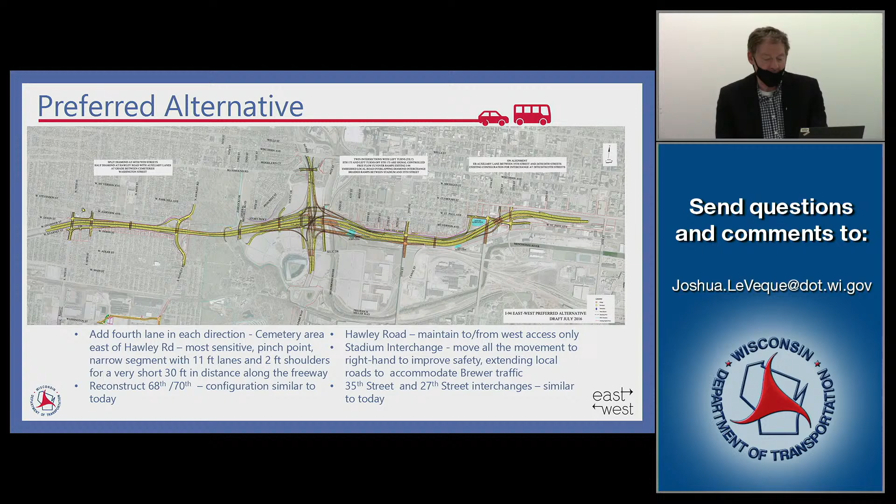So now a little bit more detail about the preferred alternative. Again, the cemetery area east of Hawley Road is our most sensitive. In green on this graphic is the new proposed lanes with the full 12-foot wide shoulder, 12-foot wide lanes, and nominal shoulders. In yellow is the area where we're transitioning down to the 11-foot lanes. And in the orange color is the 30-foot distance where we actually have the 11-foot lanes. Again, those orange areas, both eastbound and westbound, are about 30 foot in distance.

So now the stadium interchange, we're going to walk through some of the most important movements. Again, yellow is the new pavement, orange is the new bridges. In dark blue, we're showing the movements for eastbound traffic to get to 175. They're on the rightmost side of the lane configuration.

To go north, you're at the top level and you're taking a ramp over most of the other work to get north. To travel south, you're in a very similar configuration to today, taking a ramp to head south down 175.

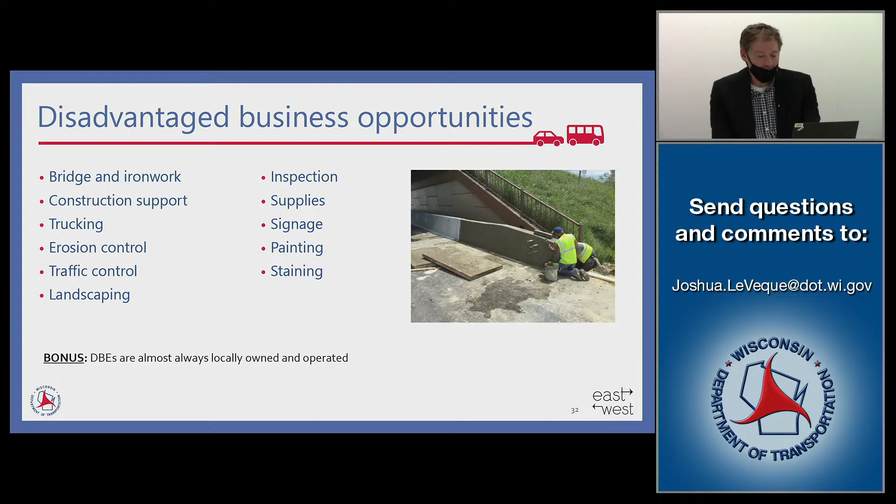We've gotten a lot of feedback about understanding the effect on property values that the project may bring to people who live near the freeway. What I want to do is read to you what is in our current EIS. Under the preferred alternative, the location of I-94 would be similar to where it is today, but to determine the net change to property values due to the wider right-of-way would be difficult because the project includes noise walls and changes in access that may also contribute to both increases or decreases in property values.

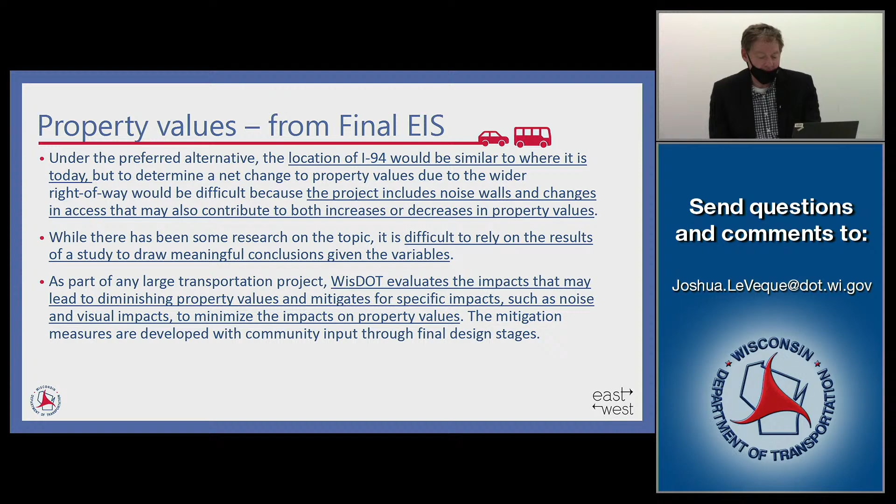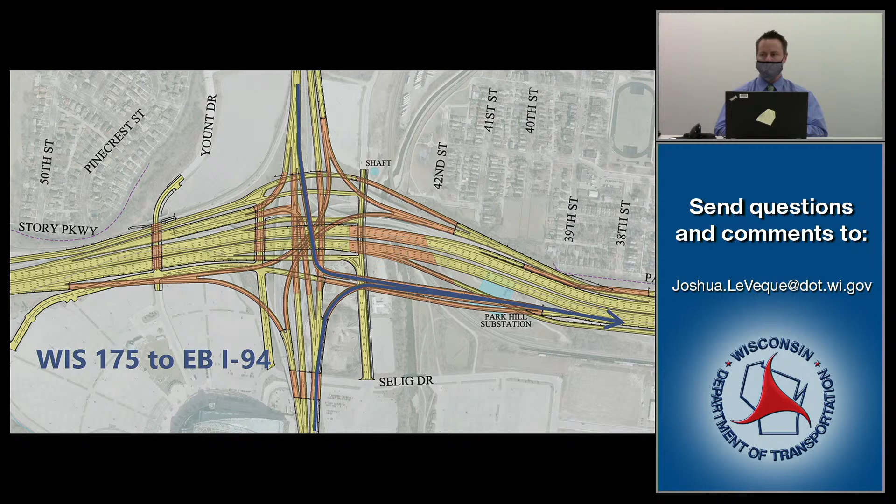Okay, thank you. We have a question here about the height of the stadium interchange. How high is the highest point of the interchange, and how does it compare to the bluff along Story Hill?

Sure, I'll take that one. Due to moving the exit ramps to the right-hand side, we're adding a level to the interchange and embedding the local street beneath it. So it's going from what we'd call a 3-level interchange today to 4 levels, and by that change, the height of the interchange is increasing by approximately 25 feet.

I did a quick check as I saw that question come in. Compared to Story Hill, from what I can see on some plans, that's about an elevation of 665 to 670, and the top of the new interchange will be about 685. So it will be slightly higher than at least the southern edge of Story Hill, but I can't see farther than that. So again, a 25-foot increase from today's highest ramp to the highest ramp in the future, which would be at 685, compared to Story Hill at about 665 to 670 today.

Thank you. We've had a number of questions and comments too about public meetings, and whether or not we're going to have any additional public meetings after this point.

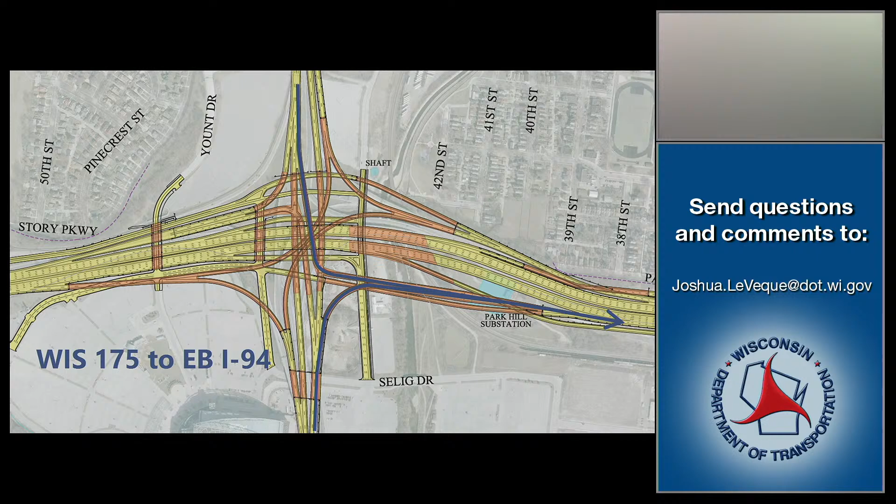And just to add to Jeff's answer, I want to emphasize that induced demand is different from pulling traffic off the local system, which we consider a good thing. If traffic can use the freeway rather than a local street, and it's the appropriate use of our facilities, that's not a bad thing.

We did get a question about how someone can submit additional comments. In addition to monitoring the chat, there is an online form on the Wisconsin DOT East-West Corridor website. If you go to Wisconsin DOT and type in I-94 East-West, you'll get to the project website pretty easily. We've also got Josh LeVeque's email on the screen here. Josh is the project manager and he's getting emails throughout this as well. We'll try to answer as many questions as we can tonight, though we won't necessarily get to everything coming in through these different mediums, but that's how people can submit other questions.

We have a design question about the traffic at the pinch point just east of Hawley Road. He wondered if we had looked at the old rail and We Energies easement just north of I-94, which I think is the section along the cemeteries there.

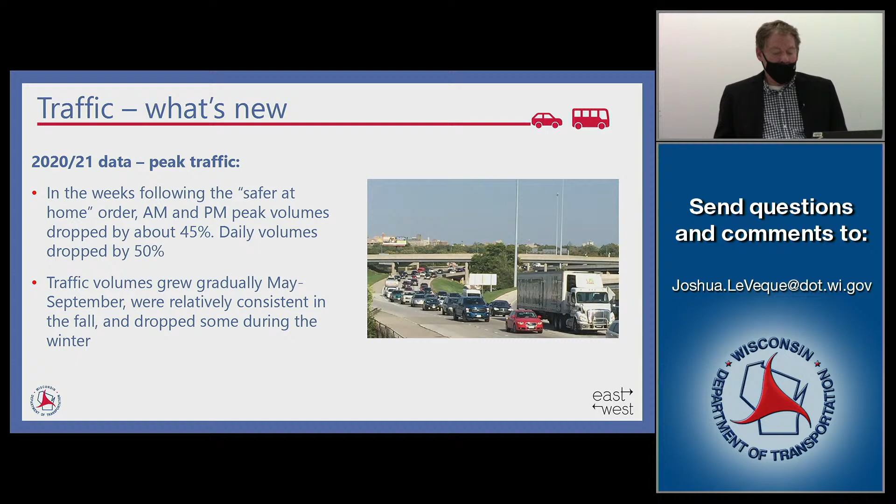Right, so we obviously have been paying attention very closely to the effects of COVID. Almost exactly a year ago today, when the Safer at Home order hit, we saw AM and PM peak hour volumes drop by 45%. The overall total volume in March of last year dropped by 50%. Then, a little later, about May through September, there was a consistent return of traffic, pretty consistent growth back toward pre-pandemic levels—never quite got there, although in the afternoon peak hours we were very, very close.

And since this winter, we've seen a bit of a drop. So I think it's fair to say there's been lots of fluctuation over the last 12 months. We're continuing to study that. Exactly what this means for trends is really the big important question, and we haven't reached any conclusion yet on exactly how the pandemic is going to permanently affect traffic volumes.

To go over it again, what we've done so far is a sensitivity analysis on how much reduction we would need for the project to change from an 8-lane proposal to a 6-lane proposal. Basically, it's a sensitivity analysis looking at pre-pandemic levels, going down in 5% increments from 0 to 5 to 10, and we got to 25% before we reached an acceptable level of service. So our conclusion is that we would need a 25% reduction in 2019 traffic to no longer justify the 8-lane, and right now we're not at that level of reduction.

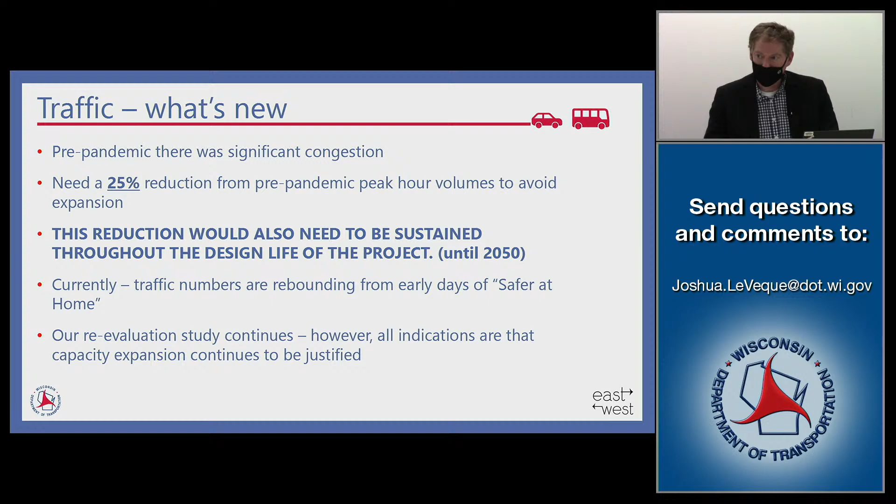There's a number of questions and concerns about safety in the stretch where there are narrow lanes and only 2-foot shoulders — about safety driving through the narrow lanes, and whether someone can pull over safely where we have 2-foot shoulders. So if you could talk about the safety concerns in that area.

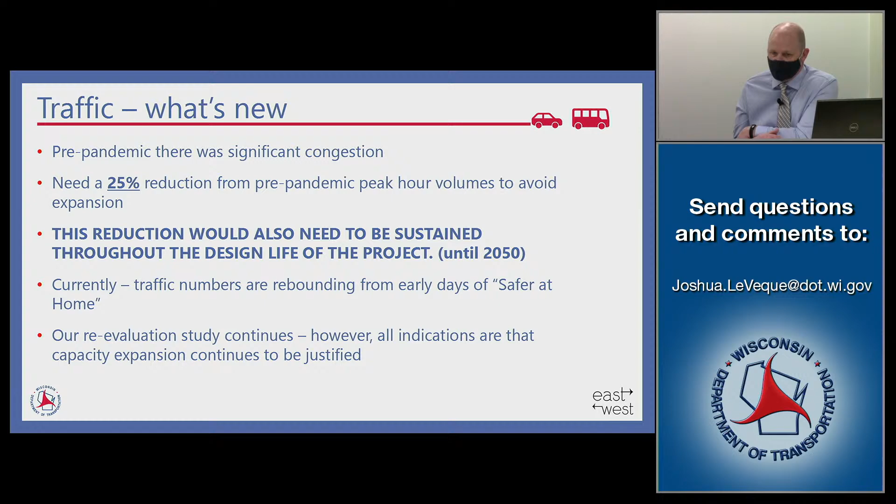Sure, the key points to hit on that: the length of this narrow section, where we're actually at 11-foot lanes and a 2-foot shoulder, is only 30 feet. The distance from the start to stop of the tapering is about 1,600 feet. If you drive this section of freeway, you know that on I-94 westbound approaching 25th Street, there are solid white lines for a significant stretch. That entire section currently is 11-foot lanes and narrow shoulders, through a curved section, so this will be much reduced from that condition.

Yes, we fully realize the short distance of narrow lanes is not desirable, but it's needed to honor our commitment not to impact the cemeteries. In addition, the removal of the eastbound entrance and exit ramps from Hawley in that area will reduce another conflict point, so we have a tangent, straight section through there with this 11-foot lane, and again for a very short distance. So all those factors, we feel the safety impact is minimized.

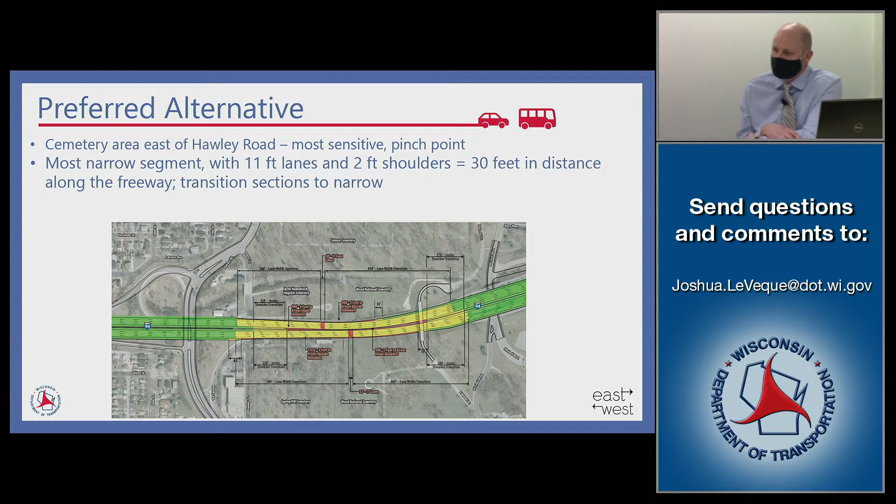Okay, thank you. There's a question about Washington Street and how it may impact the busyness of the intersection for people trying to get in and out off of 70th Street. Can you talk about any coordination we've done with the city of West Allis on Washington Street?

How that will all be planned — well, maybe a little more detail in general about Washington Street. It goes from Hawley to 70th Street. There's an existing section of Washington Street that pre-exists, and the new connection the project is proposing to construct will facilitate it. The whole goal is to have a clear, easy route for many of the businesses near Hawley that want to go east to get over to 70th so they can connect to the freeway.

It is a very congested area, a challenging and very tight area right now. I know that the work on 70th Street itself, some of the widening proposed as part of this to facilitate that busier intersection, is in a very limited area where we can do that work. So we acknowledge it's a busy area. We think the improvements are supported and coordinated. We're coordinating very closely with West Allis and supported by West Allis. We think it'll help partially mitigate the changes we're making up at the interchange.

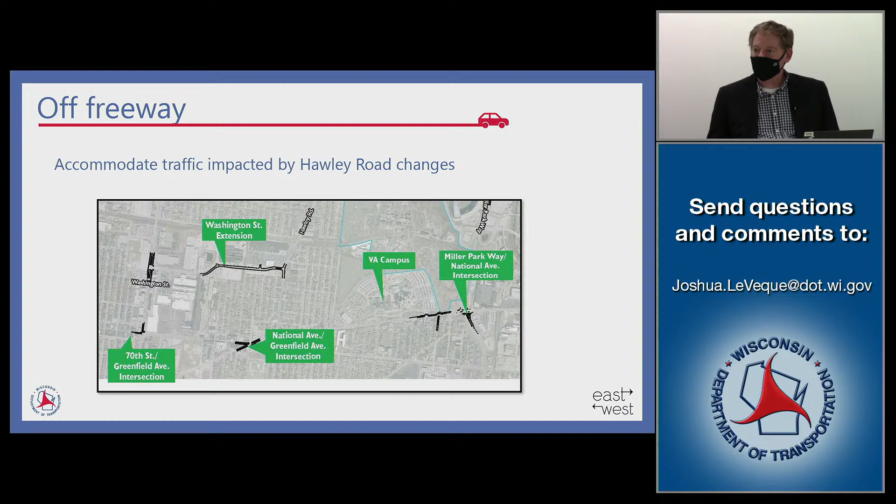Based on some of the comments we're getting from different sources, we've talked about how during rush hour, 76% of the traffic starts or ends within the corridor, and I think people are perhaps thinking that it all just travels within the corridor and not people coming to or from. So could you explain that concept a little better so people have a better understanding that it's actually people coming from another location, but maybe ending or starting there.

Sure, so this was a little bit older data from 2012, based on some origin-destination survey information. It assumes that if you're using the interchanges along within the project limits, say 27th, 35th, Hawley, 68th and 70th, you're accessing those from a fairly nearby distance, so it assumes those to be local trips. Those movements at those interchanges are considered local, therefore part of the 76%. The other end of the trip could be outside the corridor. The two examples we gave, UWM, is certainly well outside the corridor, but one end is at UWM, the other end of their trip is near the stadium, so they're using presumably the stadium interchange or Hawley to get to their end destination. I don't know, Beth, does that help explain it?

Maybe the other way to put it is that the 24%, the counter, is somebody who enters this corridor at 70th and travels all the way through, not exiting or entering on any of the other ramps or the 175 interchange. So again, three-quarters either enter 94 at one of our interchanges or exit, and one-quarter drives all the way through in the peak hour.

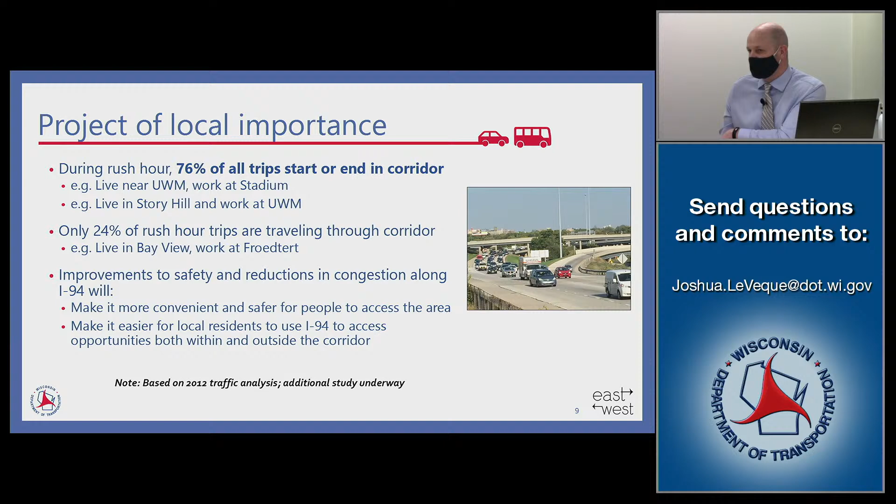Now, this is one question that I'm not sure people would have off the top of their heads, but I'm going to ask just in case. If not, we can always get back to the person.

There's a question about how we manage stormwater runoff, and do we know how much funding is spent on stormwater versus noise barriers? That's not a standard number, it's a project by project situation. That would be an answer we won't have until we're much further in the design process. There is a part of that process where people get to vote on that. So even though we understand pretty well the potential locations of noise walls, once we get further into our design, whether or not we build them is still up to the local people who get a chance to vote on them. So we'll know very late in the process how much the noise walls on this project cost, because we're not sure we're going to build them all.

There's questions here about bike and pedestrian connections, and whether any consideration has been given to improving the pedestrian and bike connections between the near west side neighborhoods and the valley, noting that I-94 is a huge barrier for making some of those connections.

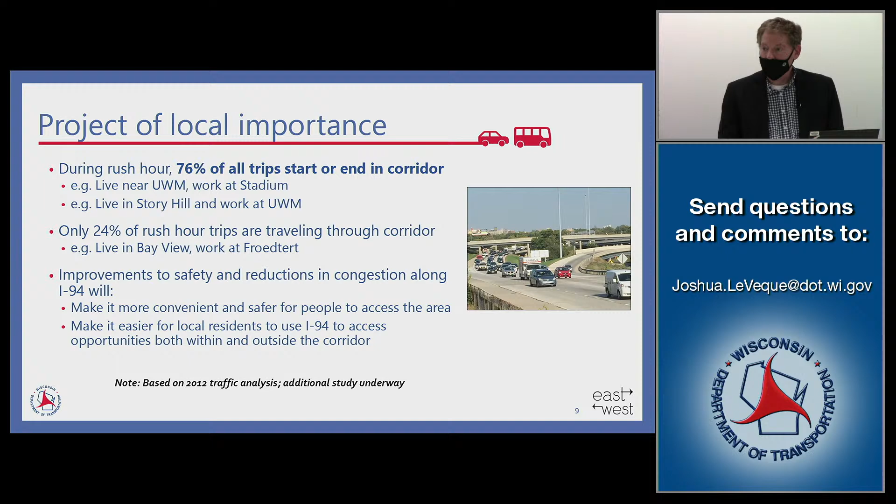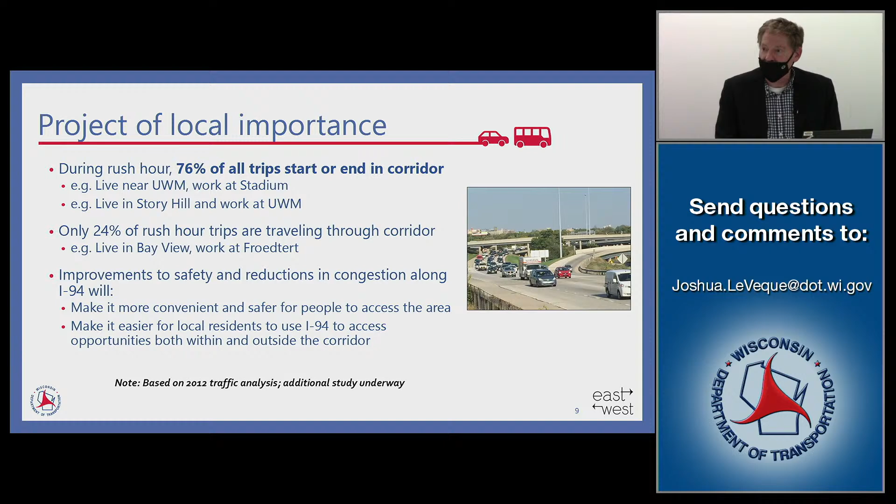There was a question about who does the reevaluation and how the process works - some people may have missed the early parts of the conversation. It's really the department. We hire consultants to help us with that process, but it's the department's project, our responsibility to document the impacts, write the EIS, get approval from federal highways, and it's our obligation to reevaluate that after a certain amount of time has passed. So the department's the lead on that.

Sorry, I'm trying to locate different questions here. Are we cutting into the bluff near Story Hill, and how much are we cutting into it?

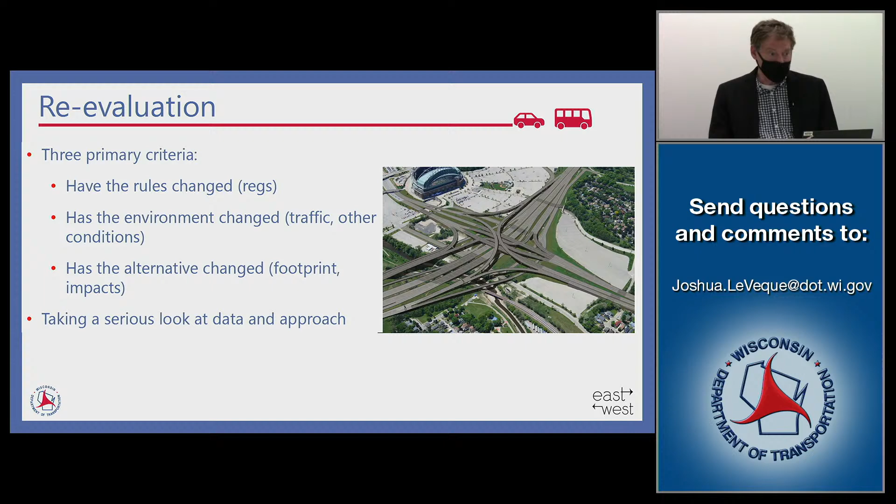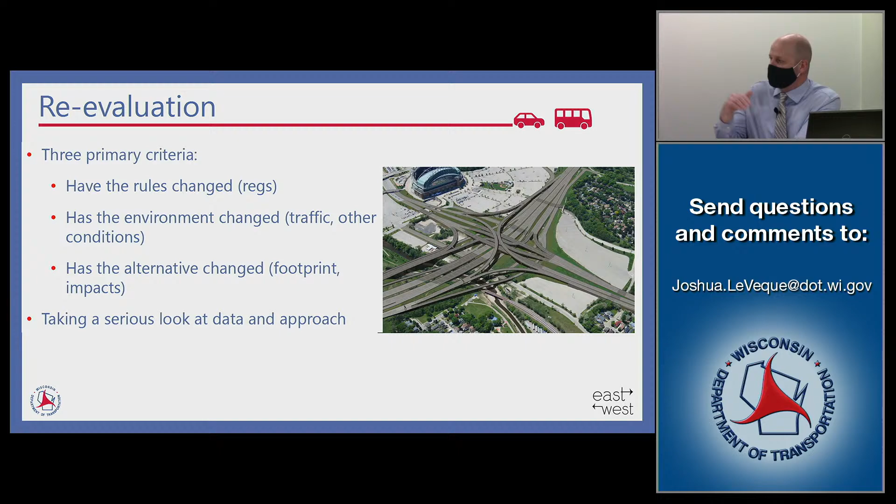Short answer is no. There's one part of the design not highlighted to this point - on the north side of the freeway as part of the current preferred alternative, the plan is to construct a new frontage road carrying local traffic from Mitchell Boulevard over to 46th and 44th. That frontage road is set to be no further north than the current north edge of the freeway and the Mitchell exit ramp. So our plan is not to cut into the hillside at all. All the widening, the extra ramp width and length for the new stadium interchange, is being pushed to the south.

There have been questions about why the savings on a project can't automatically be spent on transit and local roads. It's really because of who gets to set the priorities. It's at the legislature's discretion how much money gets put in the pots, and the transit pot is different from the highway pot and the local road pot. They set the priorities by setting those budget amounts. As the department, we can't take money the legislature said should go for highways and put it into transit. It's whose job is it to set priorities, and in this case it's the legislature's and the governor's job.

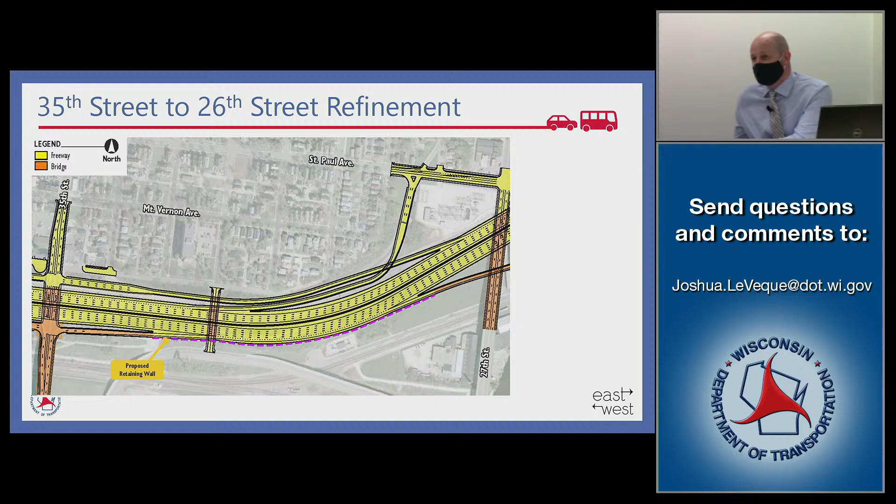There's a follow-up question about the bike-ped improvements: could those same improvements be made with a 6-lane modernization as well as an 8-lane alternative? Yeah, I would say yes. I don't think there's any limitations. I can't think of anything offhand. I would say in general, very likely yes.

Okay, there was a question regarding the design: will the freeway be raised 30 feet, or will there be a gradual increase? I'm sorry, I don't know where the 30 foot came from.

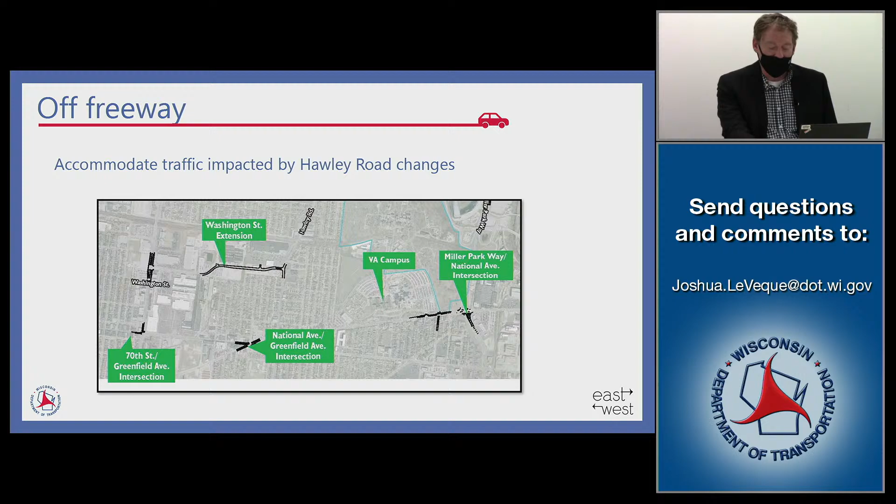We're sorry, talking about maybe the 25 feet in the stadium. In general, the elevation of the freeway is going to stay very close to where it is today. The one area where it does change is in the stadium, because we're going from a 3-level interchange to a 4-level interchange, and that increase will be very gradual. It'll mostly affect the ramps coming into the interchange, because the highest level ramps are what we call the flyover ramps.

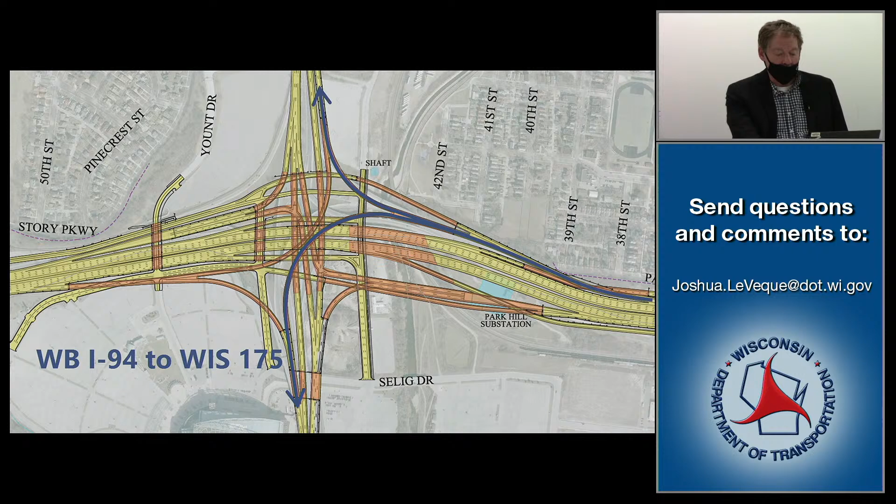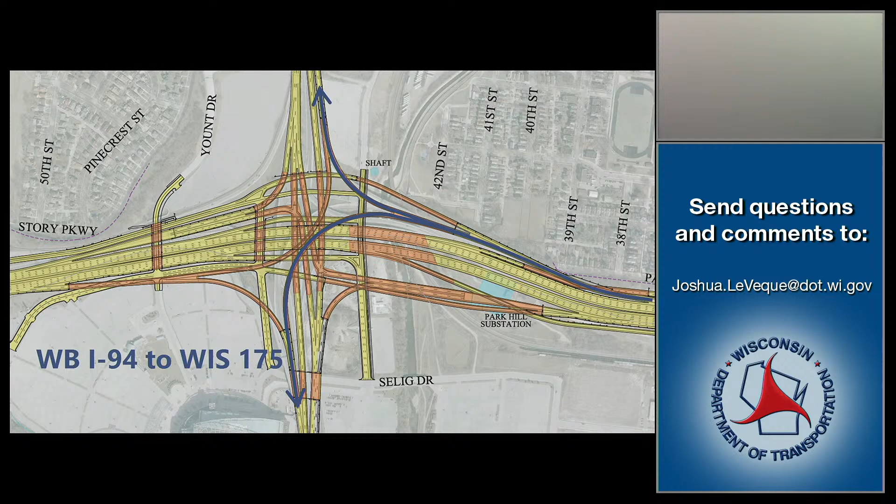Going from eastbound I-94 to northbound, and the complementary westbound to southbound move. Those are the highest ramps, and the slope on those ramps will be fairly modest and gradual. Everywhere else along the freeway is staying at a very similar elevation to today, and all the local streets that go over or under are in that same general configuration as they are today.

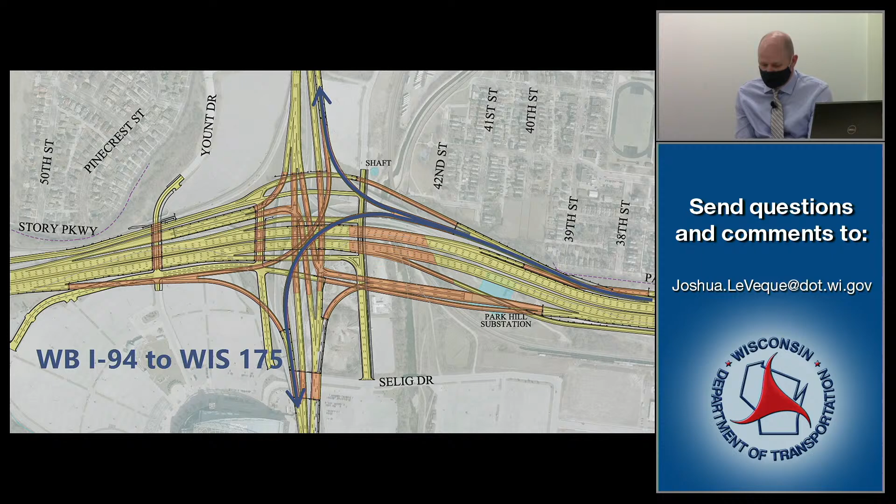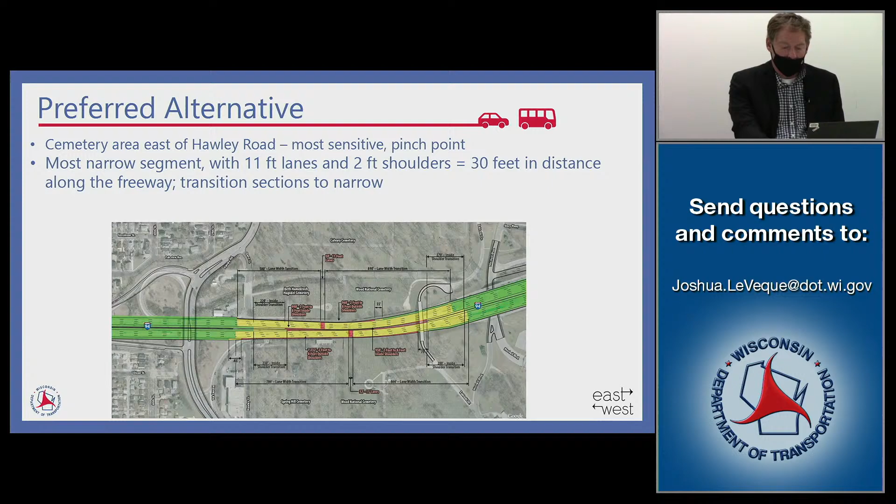We've had some repeats of earlier questions, including how highway expansion leads to revitalization in minority communities. I wonder if you could talk about some of the work we've been doing with Near West Side Partners and Menominee Valley, working to get economic revitalization in that 27th Street corridor and greater connectivity, since that may help address what's probably the most important part of the question: how we can help make that change on this project.

I think what we've heard from Menominee Valley Partners and Near West Side, two business organizations based in that area, intersecting here at 27th and St. Paul, is that they view the project as an opportunity to make the area more attractive, more connected, more integrated with the community, with less opportunity for panhandling and other criminal activity. We're hopeful to achieve some of those goals by working with them.

In more general terms, I think the fact that we've talked about DBE opportunities, and how lots of DBE businesses are locally based — for the zoo interchange, that was over $100 million of contracts that went to DBE firms — that's another way we very directly impact the minority community.

There's a question about traffic projections. We've come back to traffic a few times, but people are saying they believe traffic in the corridor has been flat for, some say 10 years, some say 20 years. I don't know if you want to address traffic in the corridor in general — there were certainly impacts during construction of the zoo interchange, many years of impacts, as well as the recession impacts around 2007-2009. Maybe you could address some of the other things that impact traffic.

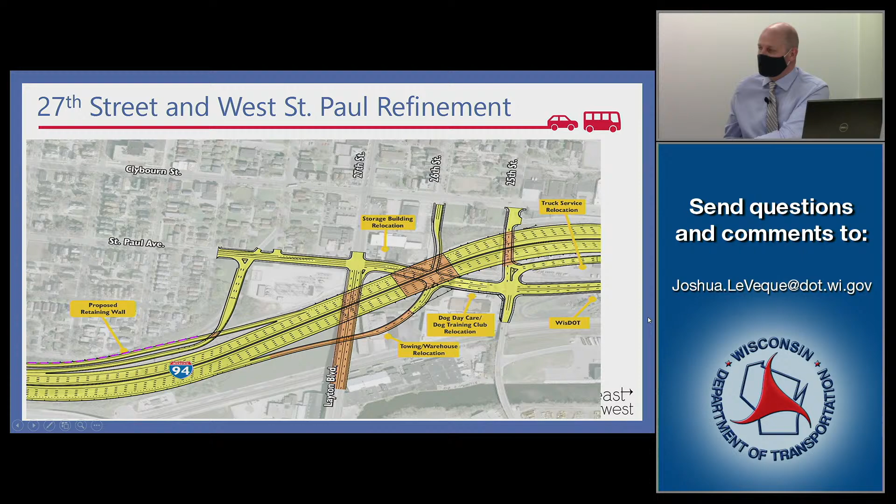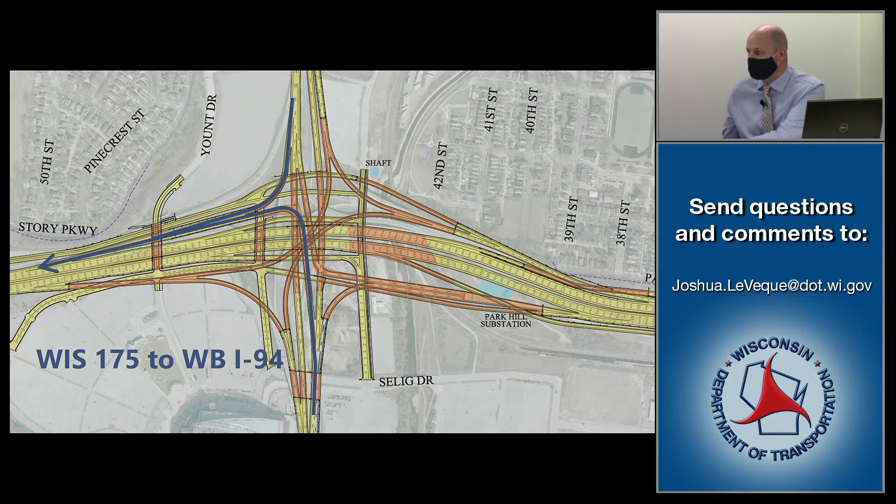I'll add that it is the department's plan to at least analyze stadium traffic discharging and how that overlaps with some of the PM peak periods, both coming in for evening and night games and discharging for afternoon games. So we'll be looking at that and working with the Brewers and the Stadium District on how we can most efficiently handle that traffic while maintaining, most importantly, the traffic on 94 east-west. Sometimes I call up the stadium interchange to show there's so many intersections and design details that can be looked at in terms of how it affects the offloading and loading of Miller Park, AmFam Field parking, and those are the types of things I think we're open to. But the amount of lanes on the freeway is probably something we're not able to accommodate.

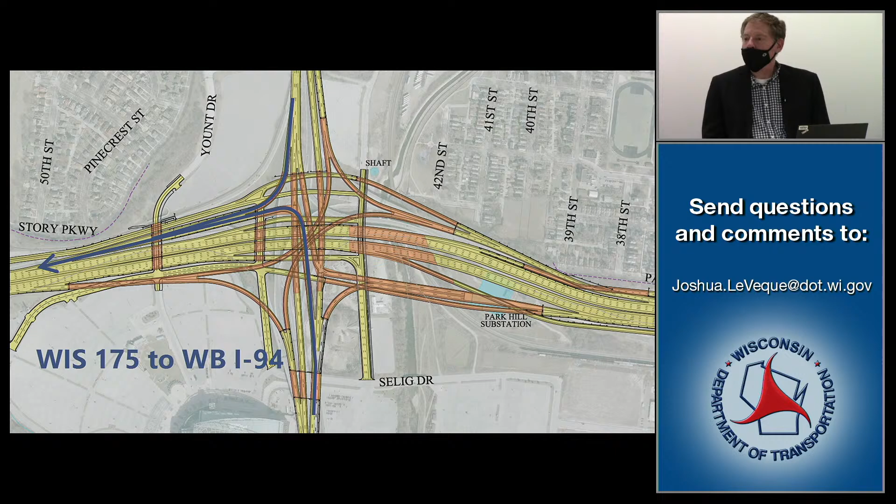We've received some comments from people representing different firms and labor unions asking how they can better connect on construction projects in the future. The DBE office and others might help, and we do have a DBE office that can explain that process. There's also the Road Builders Association, which is available to help firms understand the overall process. We can also share information about the letting process and how to become a qualified contractor.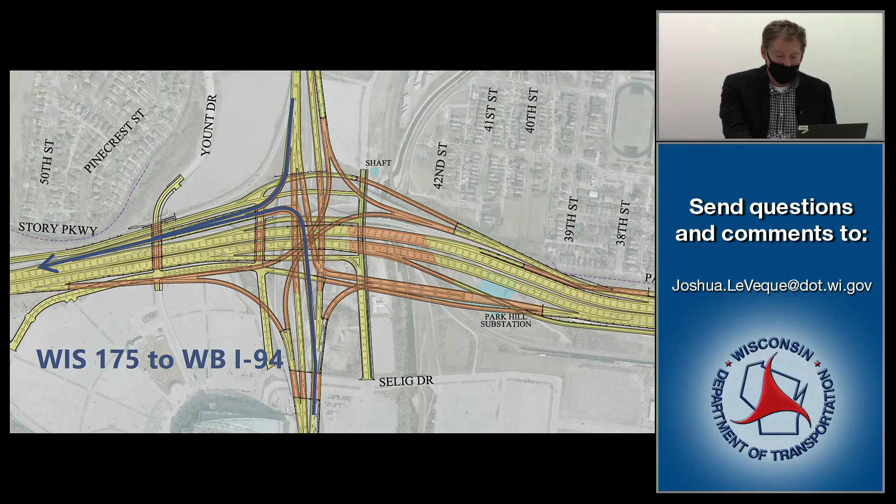We really do appreciate the comments. Sometimes people ask how we feel about getting so many negative comments, but we really do appreciate the time people spend, and we don't only talk to people who like us. It's actually very helpful, and we sincerely appreciate getting comments on the project. I'm sorry we haven't been able to get to all of them.

I'll add too, it's an important part of the reevaluation process we're in the middle of. Having these forums and getting feedback definitely helps us understand how the proposal affects the general public, and those are the types of things we have to reflect in our documentation.

In some of the other comments and correspondence, we've been getting questions about the forecast. I want to make sure people know that it will continue to be evaluated as the long-term impacts of travel patterns become known. That was actually a comment from one of the traffic people on our project, who wanted to make sure people know we're still evaluating and working to better understand the impacts of the pandemic as it's evolving.